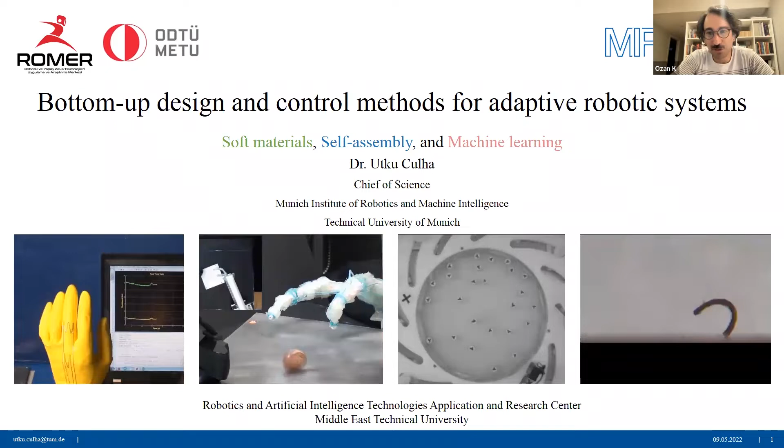Well, thank you very much. First of all, thanks very much for your kind invitation. I have been around a little bit, but half of my life and my heart is still at Ankara, Bilkent and ODTÜ, so I always feel at home when I make connections with my friends, my fellows, my PIs in Turkey. So I feel home. Thanks very much for inviting me home again.

Today, I tried to bring together some of the stuff I've been working on over the years, like Ozan briefly described, and I would like to talk about these, and maybe we go into a little bit of detail why I'm doing this as well. Ozan already talked about this, but yeah, my home is Ankara, so I left in 2012, and since then I've been wandering around like a true Turkish nomad here and there.

For the last 5 years, I'm in Germany, and after visiting these places in Central Europe and Northern Europe, I've been working as a chief of science for the last year at the Technical University of Munich. I'm the scientific manager of the Munich Institute of Robotics and Machine Intelligence. I believe it has a lot of fundamental connections with ROMER, and that's why, if you like, we can also discuss in detail what could be the synergies, the things that we could do together, which I would be very interested in, to be honest. So I feel connected to ROMER's vision and ideas, and I can totally see the hurdles and the vision there as well.

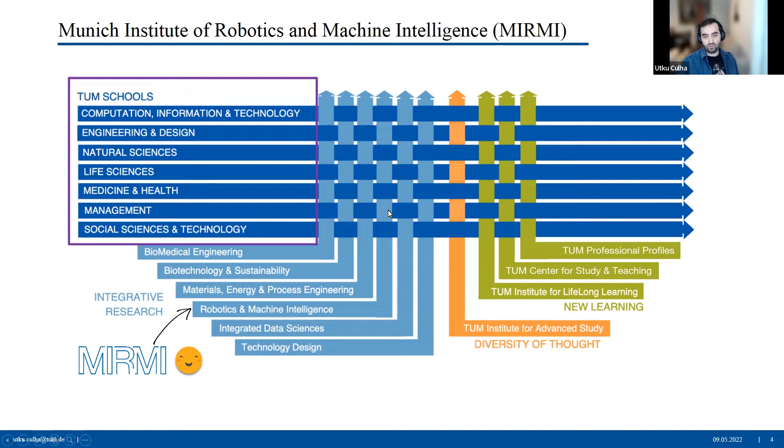What we do, as the name suggests, is a combination of, what's happening here? I hope I didn't crash anything. So it's a combination of basically four areas of robotics and machine intelligence. We are doing research on robotics, perception, AI, and machine intelligence. It's quite important, we keep saying it: we are not really doing data science. We are doing all types of machine learning applied on physical systems. We have another completely different institute that does data science, deep learning, neural networks. We are interested in things applicable on robotic hardware, not computational hardware.

So we have around 62 professors, each with their own chairs, and they bring together their expertise and vision, and we apply this vision in 4 main categories. These are our innovation sectors. One of them is environment, another is health, one is work, and the last one is mobility. Those are the innovation sectors where we put together all of our expertise and make connections with society and industry.

We have our board of directors, and we also have a scientific advisory board. We also have the industrial advisory board, which is quite a unique opportunity because we are able to sit together with C-level people of some of the top industries in Germany and in the world.

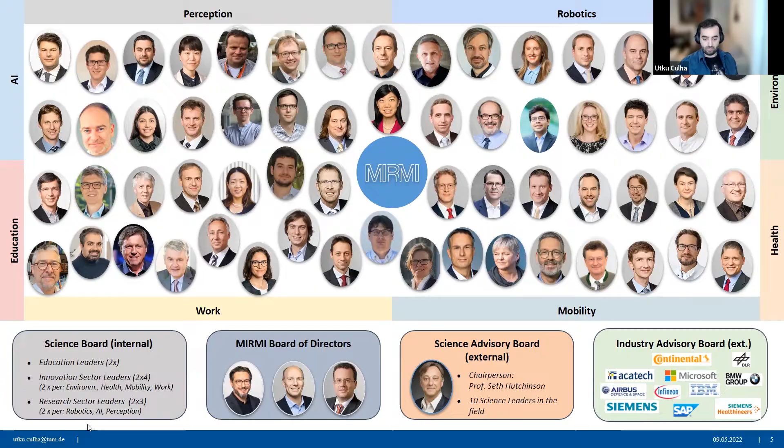Okay, so one of the things that we do here that is quite the driving mechanism behind all of the research is the Lighthouse Initiative research stories, research projects. So these are the ones that actually bring together multiple PIs from different departments. And those are the ones that we get a lot of funding from the ministries. We get funding from the German research foundations and the industrial partners. And those are the ones that have really big visions. Some of them you see on the screen now.

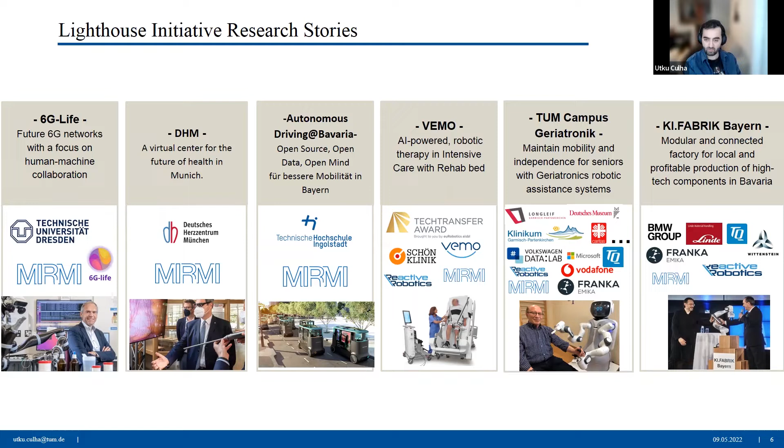We're having collaborations with different universities and different industrial partners in different parts of the innovation sectors, from communication, health, work, and mobility. So these are the ones that really make our institute a little bit more on the edge, because we are doing real world applications with real world science. So there's actually little space for futuristic, maybe exciting stuff on paper, but not really applicable in the real world. We are trying to really minimize that type of research in our institute.

I am a part of the senior management here, as I'm leading all the research activities, meaning on paper, I am doing all the research coordination between these 60 professors, but thankfully not all of them are active. So it's actually a good thing at the moment they're not all active, but I am working with all of the professors. I'm responsible for writing big proposals. I'm also a PI. I have my own research team. I work closely with the students and postdocs.

For the moment, I'm also leading a team of approximately 80 people. I think 50 of them are PhD students, 12 of them are postdocs, and there's also an engineering team. And the people you see here are also the ones that are managing the whole institute. So we have the board of directors, those are the PIs coming from different chairs, and we have officers and assistants. So I believe that's also quite a synergistic connection with ROMER as well.

So as I said, we have connections with the industry. Those are the C-level, basically CEO or CTO level people from the well-known industries. I find it to be quite unique and actually advanced that we get to sit together in the same room with these guys. They're really sparing their time for us, and they can really tell us what's missing in the industry. They really drive us, and they really drive the research accordingly, so that we know what is basically needed in the industry, so we can come together, sit together, and drive research and industrial projects together.

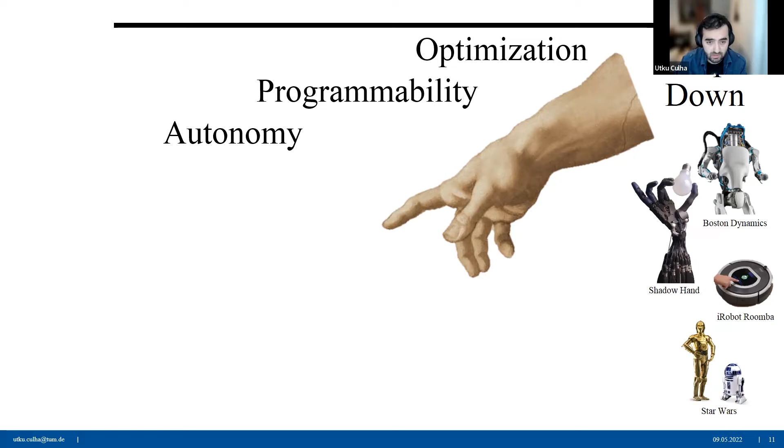What I have eventually carved out of all the research that I've been doing was bringing these two design methods together. On one hand, we have the typical top-down method that we have been applying as humankind for hundreds of thousands of years. Basically, we start with an idea of a final image of what we would like to build. It could be a robot, it could be a cake, it could be a space station. But we always start with that big idea, and then we build things with that top-down design. And of course, it has given us all degrees of freedom in terms of autonomy, programmability, and optimization. But the more I started working with soft elements and small-scale systems, I realized that the way things are built in nature really follows a different agenda.

The things actually come from the bottom up. They're little things, they're really dumb and passive. They don't have any idea about the world or have any idea about anything, basically. But through local interactions, through some external stimuli, maybe, and given millions of years of freedom, they come together in meaningful and maybe just basically operational systems.

And as compared to the other top-down methods, we see that things that are built by bottom-up methods have quite a high adaptivity capacity, they have degrees of freedom, they have modularity, and more and more we see these methods applied in robotics as well. For example,

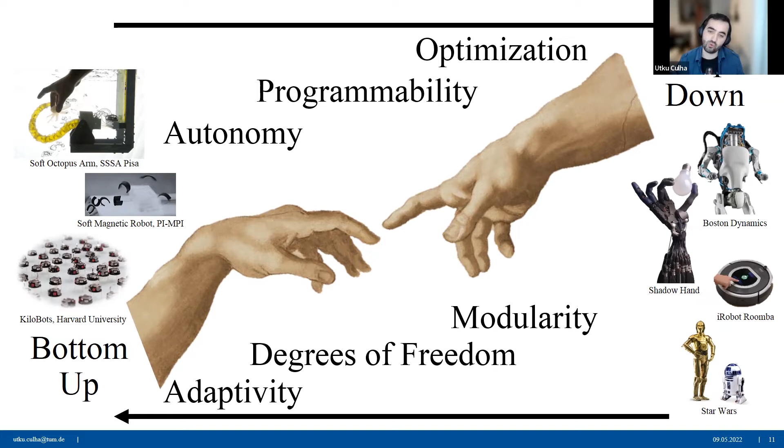Professor Şahin is one of the pioneers in swarm systems. I'm pretty sure that he has been applying these methods in control and planning and the flock management of the swarm systems. But more and more with the smaller scale systems being introduced in robotics with functional materials, we see that they are also being applied in soft robotics. And this is the connection to what I have been doing for the last 7 years.

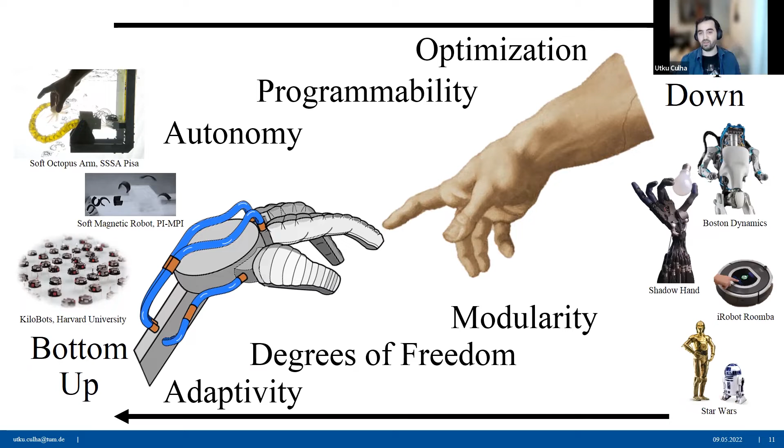So my goal is to really find a middle ground in between and hopefully get a happy marriage between these two systems. So I am coming from a robotics background, and I still have some type of OCD about introducing some type of control and planning into these naturally chaotic systems that are being built bottom up. So this is my main motivation. I'm trying to take the systems that we know in conventional robotics and apply them to the bottom-up systems in the self-assembling and soft robotic world.

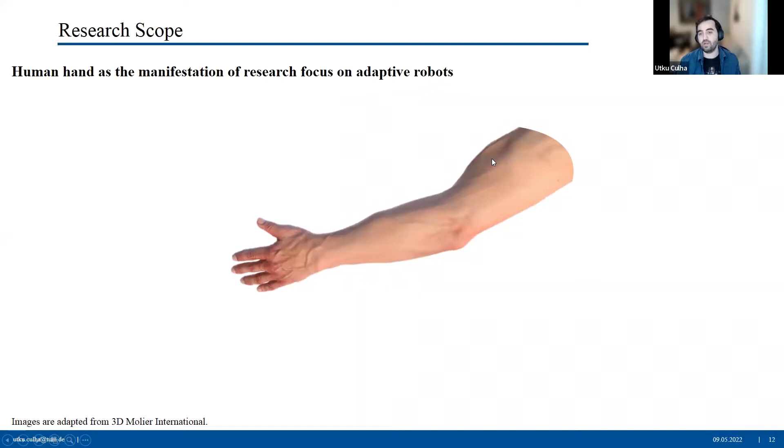Actually, I have chosen the human hand as a perfect manifestation of all the research topics that I have been working on. One of them is the hybrid systems that combine soft and rigid elements together. The other one is the self-assembling bottom-up systems that are being built by using small systems. They come together, they're modular, and they bring together something more than the combination of the systems.

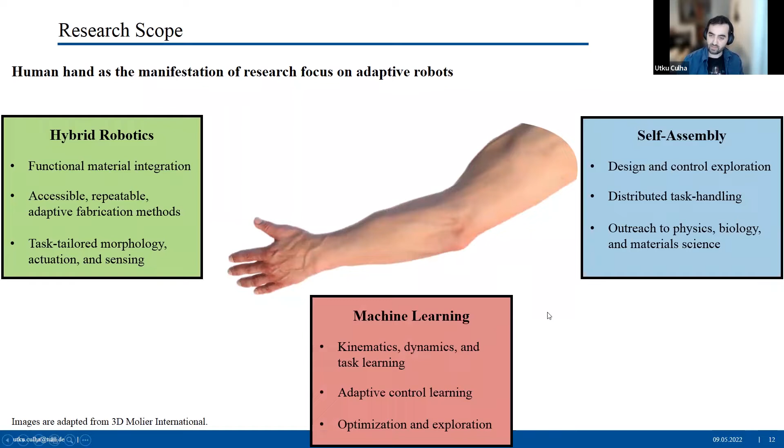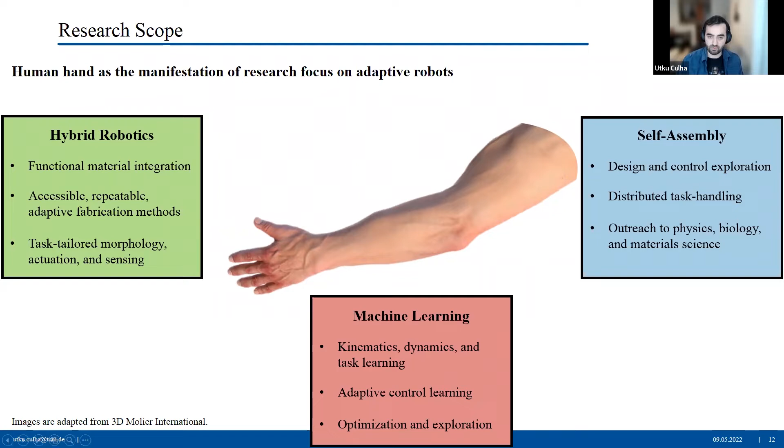And the last one is basically lifelong or machine learning that will tell us what has been missing in the whole function and morphology and the control, basically investigating the things that are not obviously clear or apparent at the beginning, but then help us to explore what's behind what we see in the robotic systems.

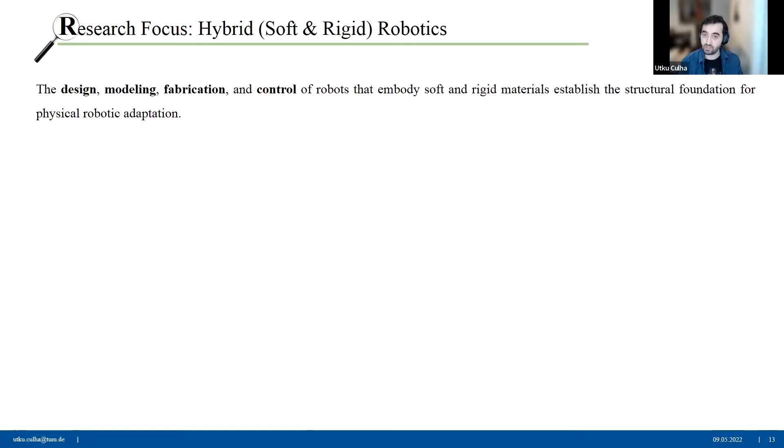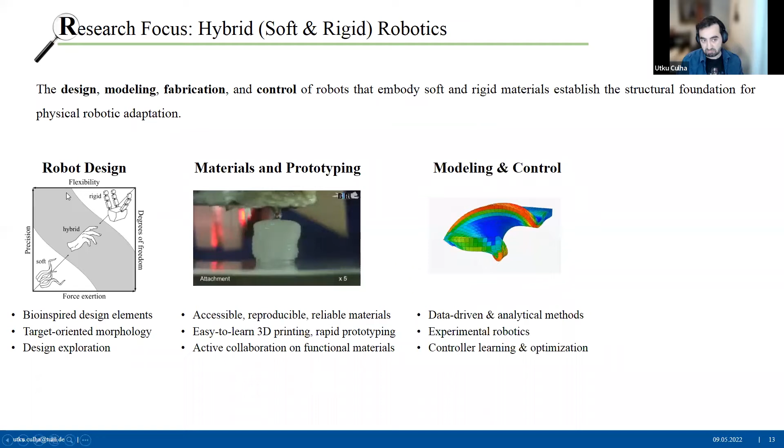So one of my research focuses is hybrid robotics. I call them hybrid because of the combination of soft and rigid materials together. And I have been working on the design, modeling, fabrication and control of these robots that are made of these soft and hard systems together. And these are basically the pillars of the robotic systems.

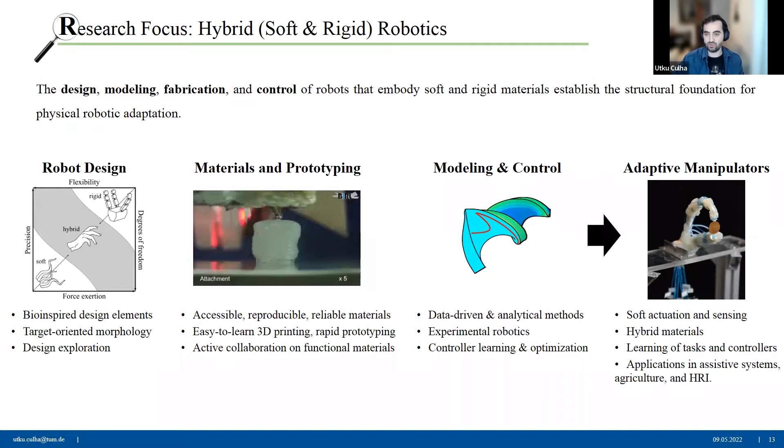You have the design, you have the materials, then the prototyping methods, you have the modeling and control, and eventually I managed to bring all of them together into adaptive manipulators. That's basically the story of where it starts, from the design to prototyping to modeling and control and eventually building adaptive manipulators.

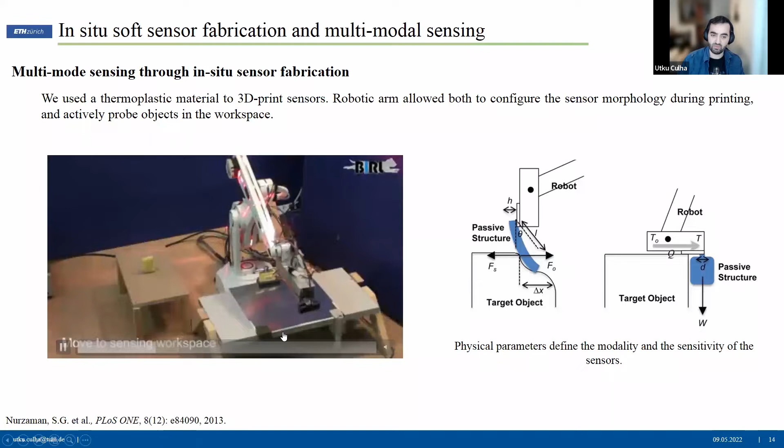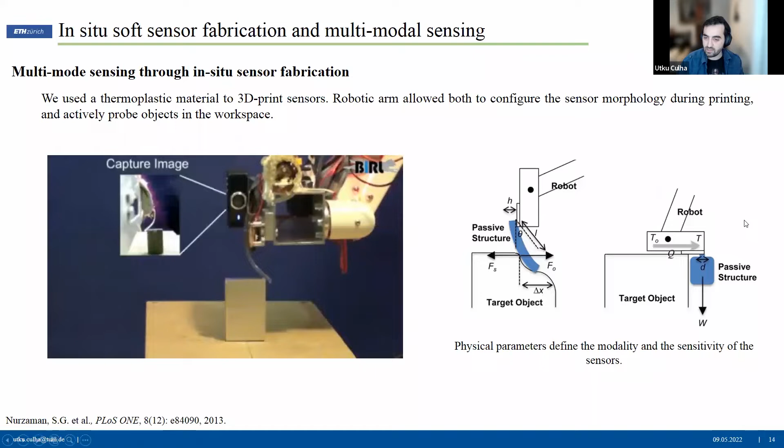But what we have attached to the end effector is a hot glue extruder. Basically, it's the ones that you use to glue things together. And it's basically a 3D printer, but it 3D prints hot glue. So we have basically modeled the adhesive and extruding properties of this hot glue, and then we turn that into a very primitive sensing system such that the robot, for example, I'll stop it here on the video, prints this

stick, a long stick. We know the modeling of the stick, we know the bending models and everything, and then the robot basically prints that, attaches it onto itself by the adhesion properties, and then goes ahead and explores some objects in the environment.

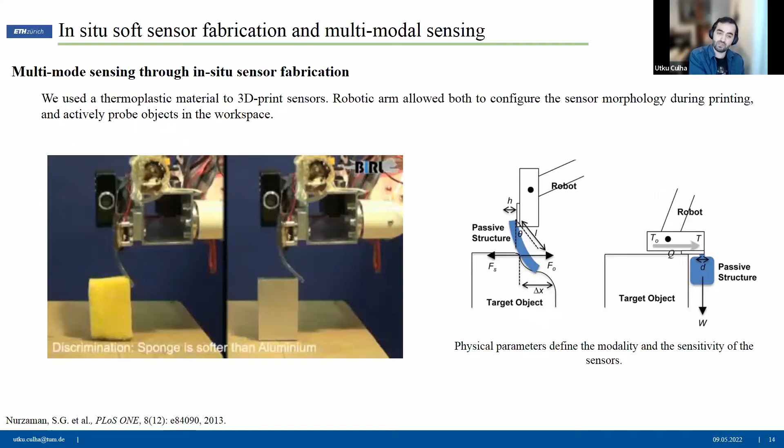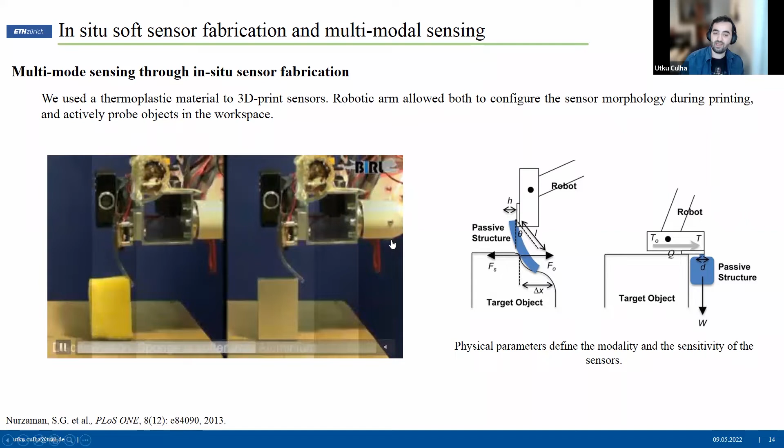Very primitive. And through the modeling of the bending beam, we know exactly how much force would be necessary to bend this specific beam. And through that, the robot has an idea about how soft or how rigid the object is. Using exactly the same system, exactly the same material, but just changing the morphology, we are able to now sense temperature.

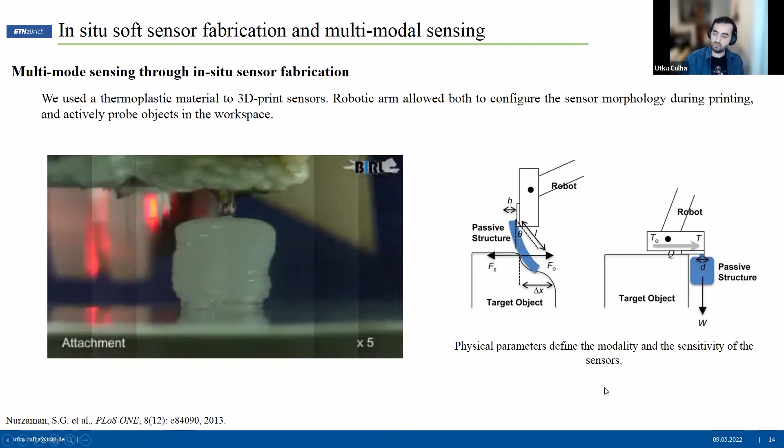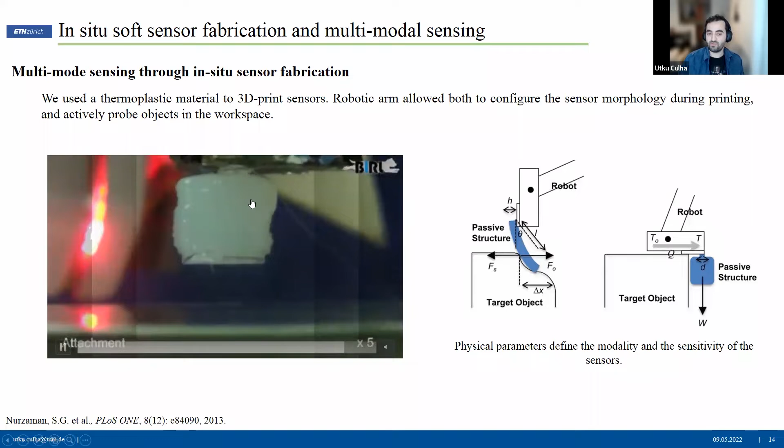But please keep this in mind, it's a very primitive sensing technology, such that this piece, this volume that we print, we know the weight of it, and we know exactly how much heat needs to be transferred such that when it touches a hot object through the heat transfer, we know the adhesive properties, we know at certain temperature, this is going to melt down and drop. So in a way, it's a very simple binary sensing system. It's like, it's hotter than this temperature or colder than this temperature.

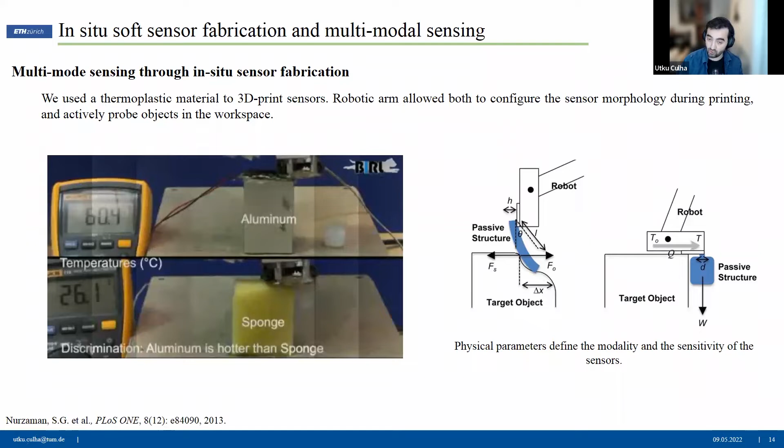In a sense, that was one of the earliest methods of exploring adaptive systems. Again, by introducing the control and methods of modeling and simulation to a continuum world of soft material in terms of extrusion and adhesion. This was the second thing that I have done, basically following the same idea. But here we are now talking about something a little bit more advanced in terms of sensing capabilities.

This was the time when I was in ETH. We worked together with the materials department called EMPA. They're basically an amazing institute. They invent tons of different materials, but sometimes they don't know what to do with them. So this was a perfect collaboration. They had this material called the conductive thermoplastic elastomer. It's again a thermoplastic extruding system, and this time you have conductive carbon filler in it.

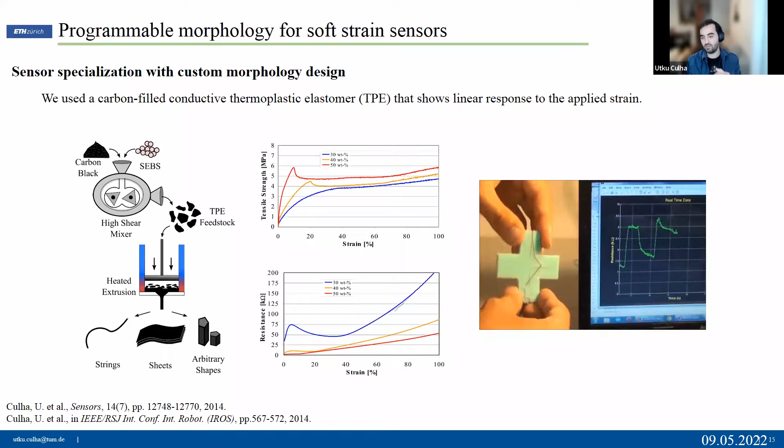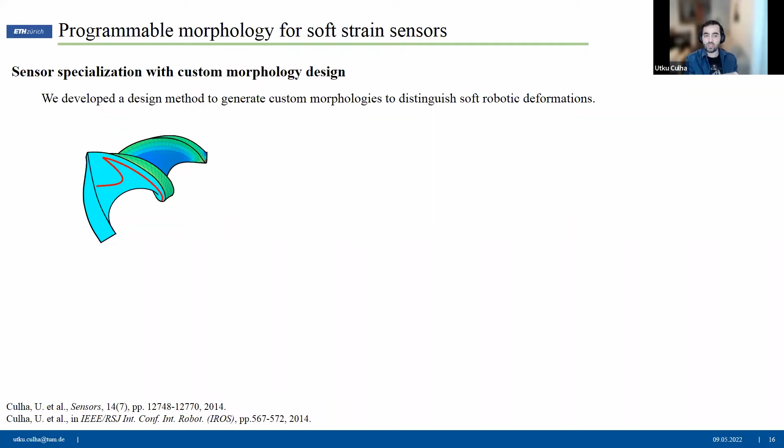So what you do here, you basically generate a voltage divider circuit, as I say. You put this material on top of your soft elements, and then you can see, as in the video, you can generate a strain response from the system. And then the way I worked on this was basically modeling the deformation of the system. It was on the surface. From the surface, we were extracting the strain information and just basically connecting the dots like in these old puzzle magazines. You were able to generate a custom morphology that is unique to detect the certain strain information that exists on the surface of the soft material.

And we were using this to define our custom morphology. Because this was a linear combination of certain strain regions, we were able to optimize the signal to noise ratio, and then we were able to get unique information.

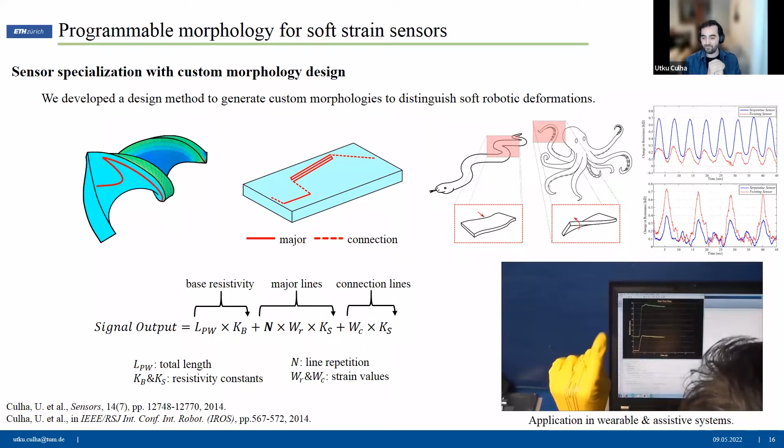So excuse me about the hand gesture here. I didn't know. We were trying to show the letters of our institute, ETH. This is American sign language. So what you're seeing here on my glove, that's me. You can see that on the middle finger, you see these two sensors. Those black things are the sensors. And from two different joints, we were able to get unique information.

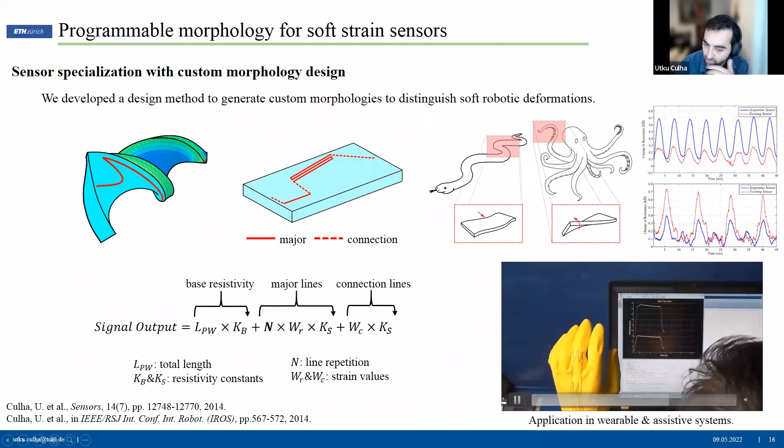And with these two pieces of information, we were able to basically understand the type of deformation and then convert that into sign language. Quite primitive, but still the idea behind this one is applying methods of modeling and control so that we were able to generate sensing for soft robotics. That's the main idea. And we went on and we applied this to very common deformation types in the soft robotics world, which is basically bending and twisting. And we were able to generate sensing information for soft robots.

So this was sensing. That was one part of what I have done. And this was basically, what do you call this, like a side project. We wanted to see if we could really make use of the same model that we have developed for the extrusion of that hot glue material. By the way, it's just the Pattex hot glue. You can just buy it from every convenience store. This was basically the first half of my PhD. I burned myself quite a lot, but I learned a lot about this glue. It's quite an interesting and educational tool, by the way.

It really allows students to build prototypes very quickly so that they can really build things with their hands and see how they move. And then we really made use of that in the education part as well. We made a lot of workshops. We gave this to students, and then they built these robots. We gave them actuators, self-propelled systems, and then we asked them to put these together so that they build crawling robots. And that was actually quite interesting.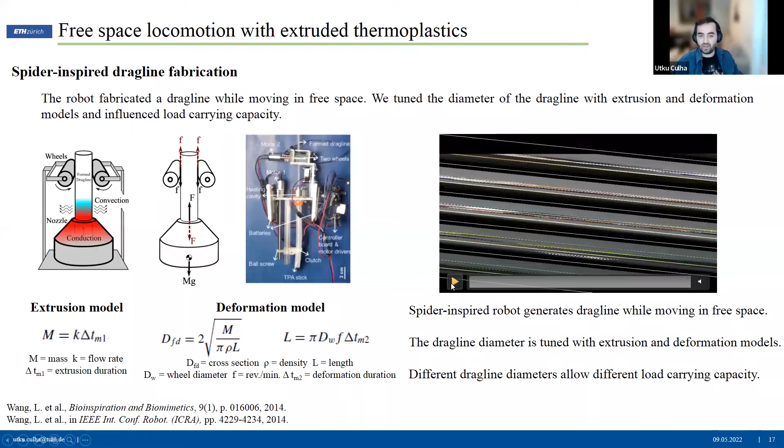down by gravity. So we could model all the extrusion parameters so that we can change the diameter of the dragline, we can change the speed of the robot. And the idea is that we were able to basically show that once we applied this modeling and control, we were able to generate a different type of locomotion in free space.

So this was basically the first half of my PhD, where I worked a lot with the soft material, the hot glue. And then I went more towards the field of combining these systems together. This is how I am coming to the human hand as the perfect manifestation. So one idea we had was to introduce softness into robotic manipulators, such that we introduce adaptivity, but at the same time, we still wanted to remain in the robotics world. So we didn't want to go full soft, where we don't have any idea about what's happening.

So this was our initial attempt of building an anthropomorphic robotic finger, such that we have rigid elements like the human bones, but unlike the typical hinge joints that robots have, we have these soft joints. Basically, it's wrapped around by tendon-like systems. We have shells that are basically covering the joints. So with the joint geometry, which guides the motion, and with the shell that is covering the whole joint, we're able to generate a freedom space that is beyond the joint motion.

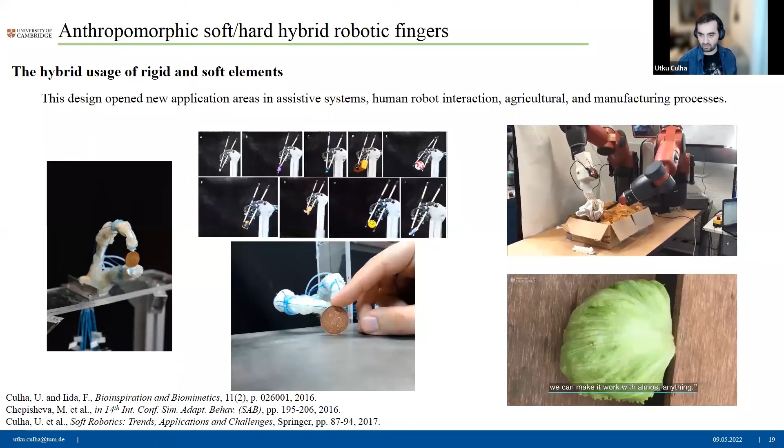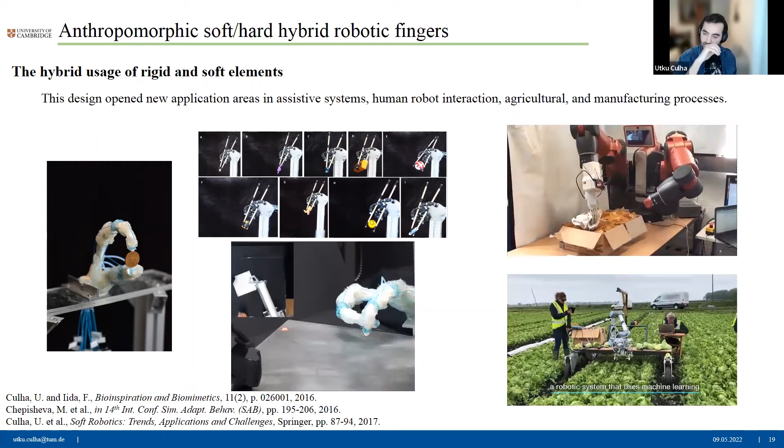Sainsbury, that's basically the equivalent of Migros in Turkey, but they produce their own produce. They were interested in applying these fingers, robotic hands, in collecting lettuce, which is quite a tough robotic challenge because the lettuce is quite soft and you want to pick it up without exploding it. So it was a good application field that shows how we can use soft and rigid systems together.

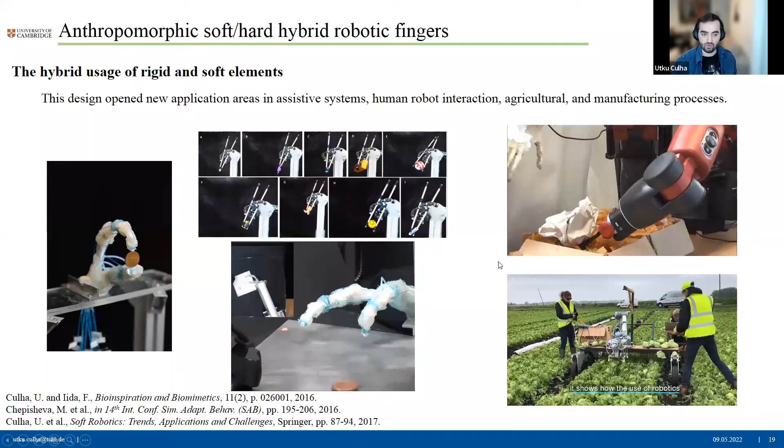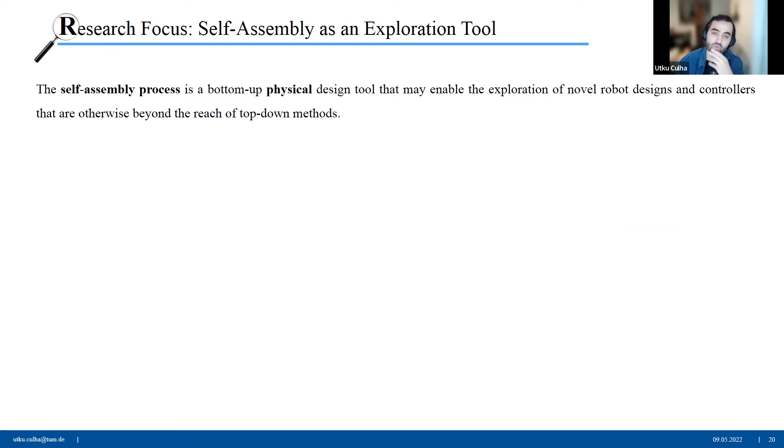And eventually it turned into a startup company. I guess they're now applying that onto the fields. So that was basically my PhD. Then I started working on self-assembly processes because I wanted to take this research towards self-healing or self-adapting systems that are more like cellular systems. And that is why I moved to Max Planck Institute to work a little bit more on the self-assembling systems, because they were experts in small scale soft robots, small scale magnetic systems.

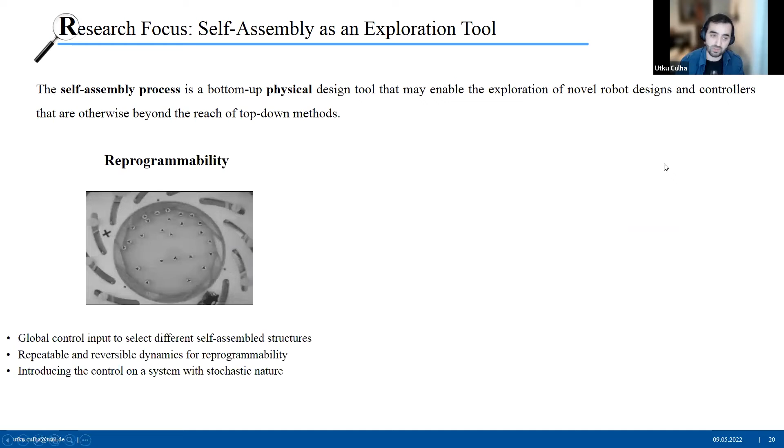And my idea there was to investigate this dynamic world of self-assembling, self-organizing systems, which is beyond my capacity. I can easily acknowledge that this is too much to handle, all these Brownians and all these dynamic systems. But I still managed to scratch the surface a little bit so that I understood a little bit of these self-assembling, self-organizing systems.

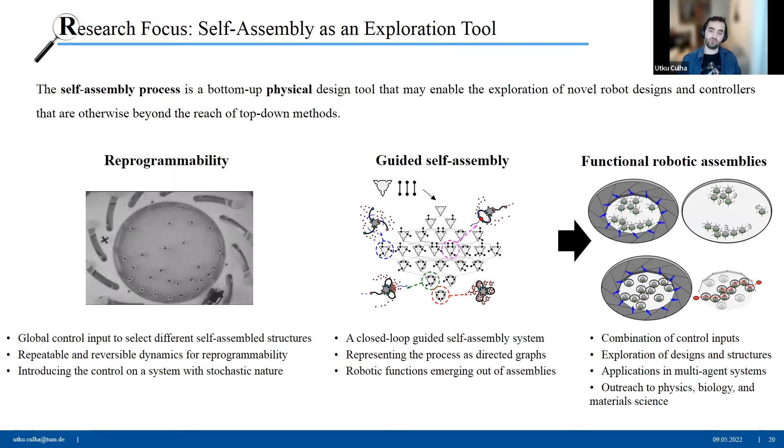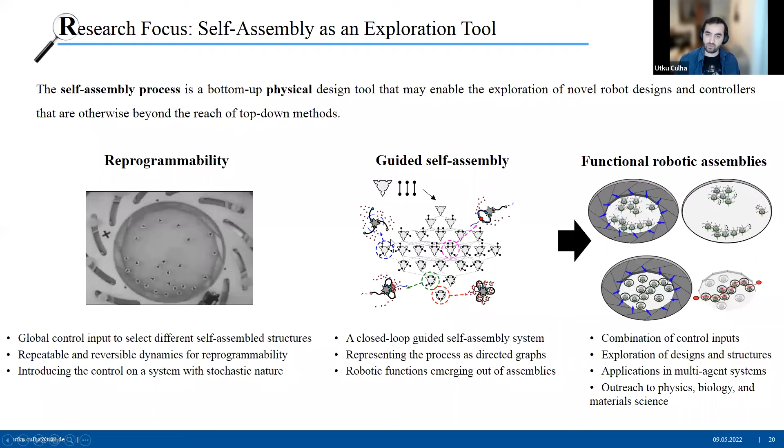What's the balance of how much you can introduce control and how much you can introduce modeling to a basically naturally chaotic system, such that it still explores a lot beyond the human control, beyond the human foresight, but still you're able to operate these systems and they do the things that you want them to do in human lifetime. So my idea was to basically look at reprogrammability, guided self-assembly, and then taking these things into functional robotic assemblies.

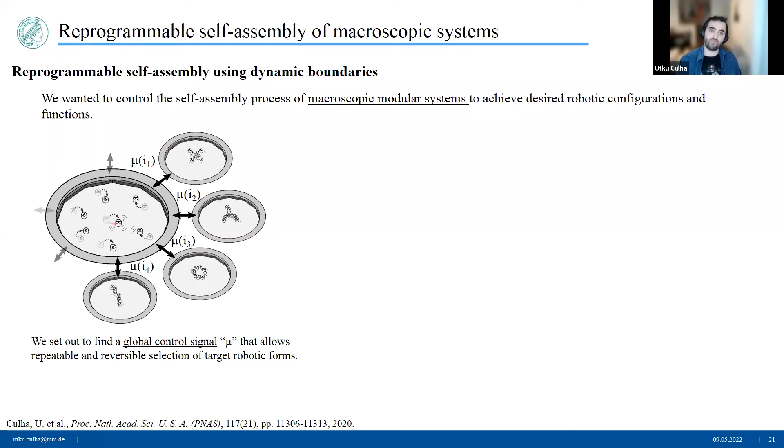I had the chance of getting a Humboldt scholarship there, which gave me the freedom to not worry about publications for 2 years. So I was able to really go into understanding the self-assembly world. And what I wanted to do there was really, again, scratch the surface a little bit so that we could use macroscopic systems and apply self-assembly, self-organization plus control, to investigate how these robots can come together. I'm pretty sure this resonates a lot with Professor Shine's great work in terms of swarm systems. But I try to do these things with much, much simpler and much dumber particles.

What you see here is basically 3D printed particles. These were, I think, 5 millimeter in diameter, and they had a magnet inside them. All of them had a permanent magnet. What I did was I placed all of these things on a system like this. What you see here is an exploded view of the system. It's an external control method that basically changes the free space of these particles. And each of these particles, as I said, they have a permanent magnet and they're all in the same orientation.

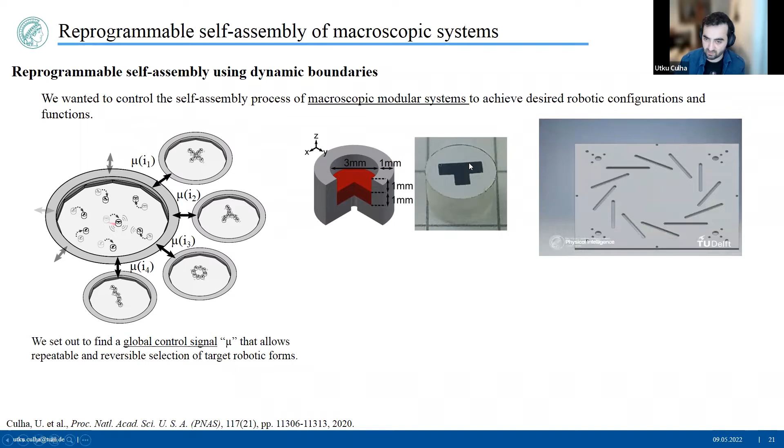So if you squeeze them in a 2D world, they're repelling, right? Once you squeeze them all together, they're going to repel one another. And then in order to apply the same type of Brownian systems, I needed some sort of a self-propelling mechanism for these particles. What we did was to put all of this system on an orbital shaker that generates the kinetic energy to these particles. So you can imagine that these particles, with the given space, they all move around, they shake.

And then what we wanted to do was to see if this control method, which is basically squeezing them, it has a lot of connections to material science, by the way. But we were extremely careful in not making one-to-one analogies because we got rejected multiple times. So that's the curse of working in a multidisciplinary world. You have to be really respectful and careful in what you're saying. You have to say this is a Brownian-like motion, this is an annealing-like work, because you're trying to do the same things in the macroscopic world, which doesn't apply. But you got the idea.

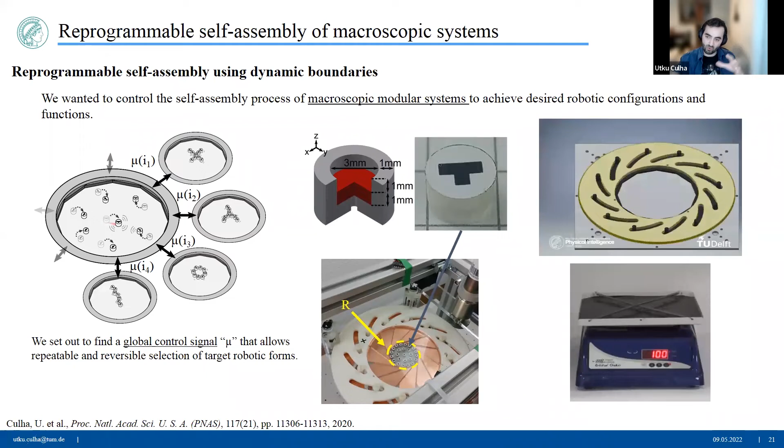We wanted to find the interplay between this free motion and the external control, such that the question was if we can really change the speed of the annealing, the speed of the compression, to see if these particles will end up in the formations that we want. Because what you're seeing here is just one example. The more you squeeze, because the particles are repulsive, they all try to repel each other, even though the whole system is shaking like crazy, you are basically trapping them in a magnetic potential lock, because they can't move anywhere.

There's this balance between the magnetic force and the mechanical force, so they can't move. And they basically freeze in time and space in different configurations like this. And we wanted to investigate what's the connection between that control method, which is basically the speed of compression, and the final patterns that we get. And what we are defining as pattern here is very simple.

We had these 25 particles here, and eventually they all freeze up in these different circular formations. And we wanted to see if there's a statistical connection between that and our control method. I hope that you see that this is really trying to introduce some sort of a control method to a very statistical system. And we managed to extract some statistical information out of it.

I'm going to give one example. I think that's the simplest or the easiest one to understand, and it has a lot of connections with material science as well. The slowest compression speed, the slowest annealing, basically, or the more time you give for these particles to find their best location, we ended up with a pattern that has the lowest magnetic energy. And the way we describe magnetic energy is basically the potential that is calculated in between each of these particles.

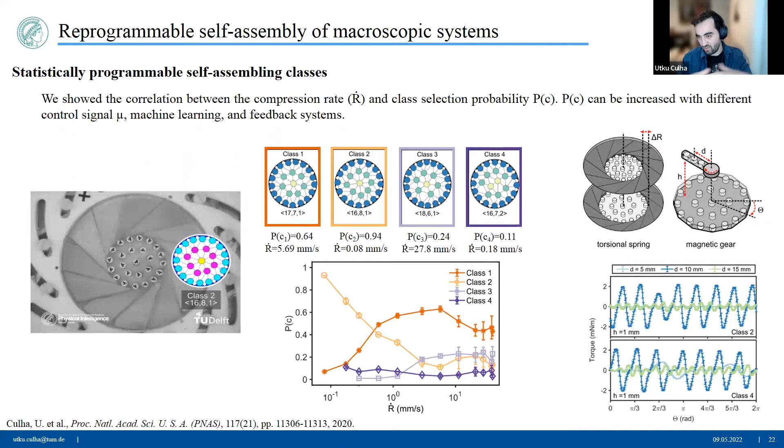And there was maybe a little bit too much forcing here, but there was some sort of application that we thought of, because these are magnetic systems. You can imagine that that's a variable stiffness mechanism. So there's a torsional spring, because depending on where the particles end up, they generate a force on the leaves here. So you can imagine that could be a continuous variable stiffness mechanism. Also, because there's a magnetic field on top of the system, you can imagine there's a magnetic gear whose property you can change by changing this method.

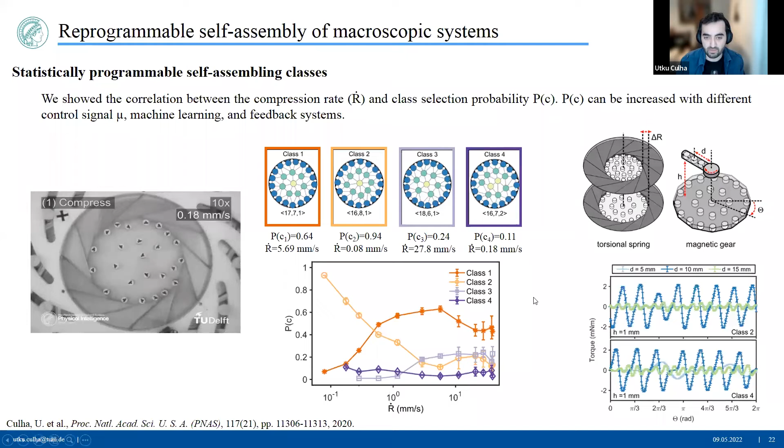So that work actually took two years to really go into detail, and then I explain what's the control method, what's the model, how you can explain these things. And then after 2 years, we were able to apply the same approach to a little bit more fun, more robotic application. Here, what you see is a family tree. It's basically a connected graph. What you're seeing here are 4 different pieces.

The cheese-looking thing in the middle, triangular, is the hub. It has magnets on it. And all these little 2-dot arms are basically magnetic arms. They are connected to one another with a soft system, and they also have magnets in them. But unlike the previous one, we have an attractive interaction between these arms and the hub. So arms repel each other, but arms attract to the hub.

So the idea is, given these 4 particles, how can we introduce some sort of an external control method while these are freely rotating around, such that all of these particles end up the way we want them? And if you force enough, you can imagine that each of these structures can represent some sort of a robotic system. For example, if you have all three arms attached to the central hub, we call that a mother bird. So all arms are connected.

And we wanted to see if we can start from a completely disassembled system, introduce the control, and really use graph theory to guide the whole assembly towards the target assembly, in this case the mother bird. So the previous one was kind of an open loop system. We just applied the same external control method, which was the speed of the compression, and finally took the final image. So that was, in a sense, a much looser feedback system.

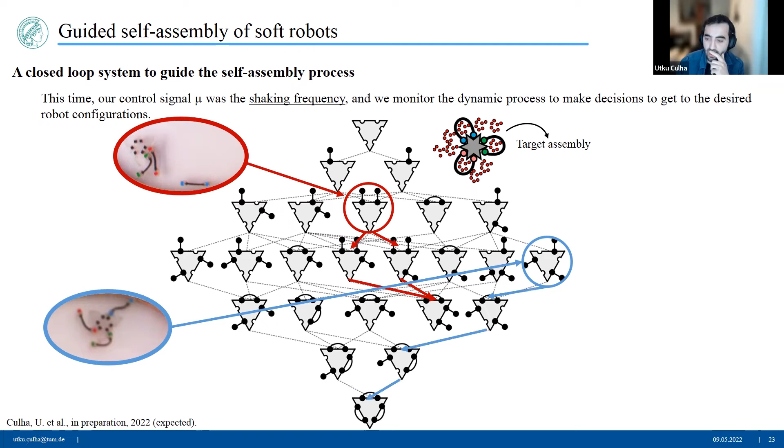And this means, for example, the two arms are attached too close to one another. It means we can't really go ahead by applying the same approach. This means we have to change the frequency so that the system is disassembled and then they can be assembled again. But for example, for a different snapshot, let's have a look at this one. So the arms are actually attached like this. So we can apply a certain frequency of orbital shaking so that it follows this graph here and eventually it reaches the target assembly.

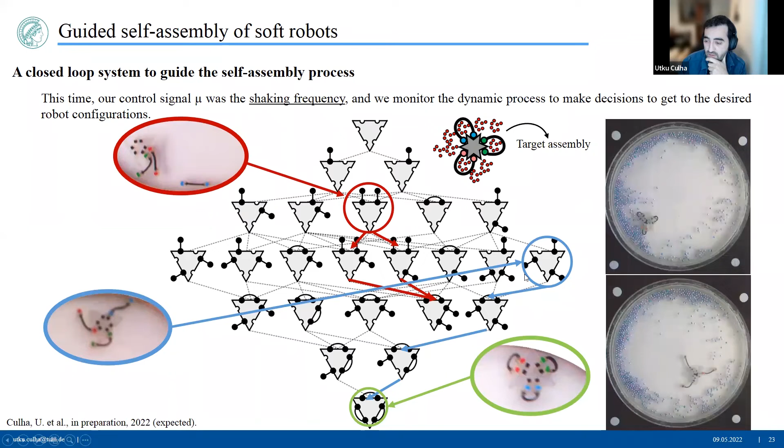So what we can do when they're all assembled, based on how they assemble, as I said, you can attach some sort of robotic function to each of these. So the top one, because these are also magnetic, you can also apply a magnetic actuation to move them around. You can just generate this propeller motion and so on and so forth. So that was the self-assembling world. As I said, that was quite a big quest in terms of scratching the surface and understanding the self-organization and applying some sort of control methods to see if we can really guide these systems into what we want.

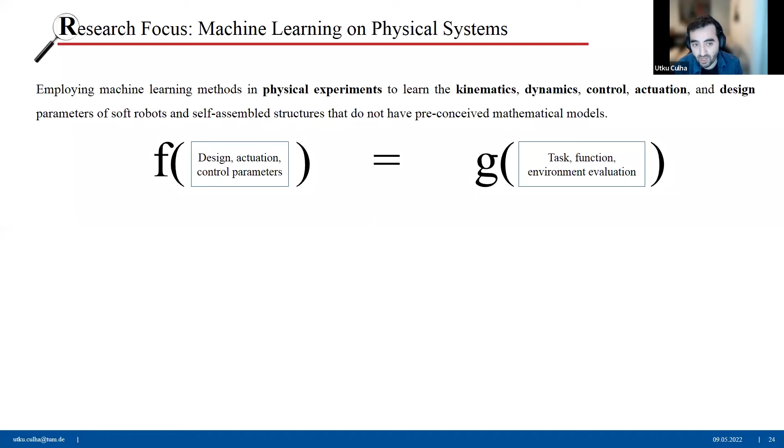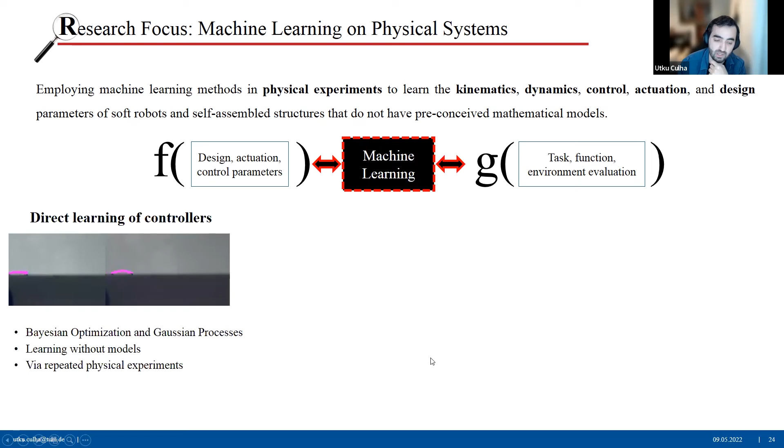What we have done later on was to apply machine learning methods into soft systems and self-assembling systems, which are basically lacking the connection between the input and output functions. So in general, you can say that they are lacking the Jacobian a lot because of the way they're built, because they're very statistical. And this is the point where we started applying machine learning on these methods. And this was my last years in Max Planck Institute in Germany. And here we started to investigate if machine learning could extract the controller parameters for small-scale soft robotic systems.

And the idea was to have these soft continuum and externally actuated magnetic robots, which had really not so clear control parameters. And we wanted to really go into the detail of finding the optimized control parameters for these systems. And the next steps would have been extracting the dynamics and kinematics of the systems, and then basically lay out the unknowns of the soft robotic world in the small scale.

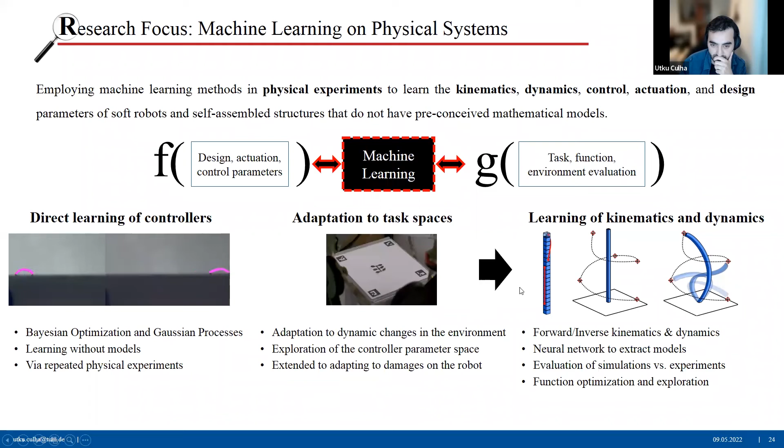This was a work that I had the chance, I think I have seen his name, he was in the audience, Sinan Özgün Demir. I had the chance to work with him in Max Planck Institute. He was the one who really took the whole system from the bottom and then really brought it into a very adaptive and trustable system.

So what we did was we took one of the flagships of our institute in terms of publication, we took a system like this. I'll stop the video here. If I'm not wrong, this was a 3 millimeter long cast robot, which had magnetic particles in it. The way you do it is you basically mix these particles together in an elastomer compound. And then once you apply a very strong magnetic field, while the robot is in a certain position, the magnetic orientation of the particles is basically fixed.

And once you reapply a magnetic field that is actually weaker than the original one, you can generate a magnetic torque around it. So the particles basically try to align themselves with that magnetic field, and then they generate this torque on the robot. And that's basically the premise of the whole magnetic actuation in magnetoelastomers. So this was one of the flagships of the institute. They have generated this crazy little robot by applying different magnetic directions and frequencies. You can make it walk, you can make it jump, you can do a lot of things.

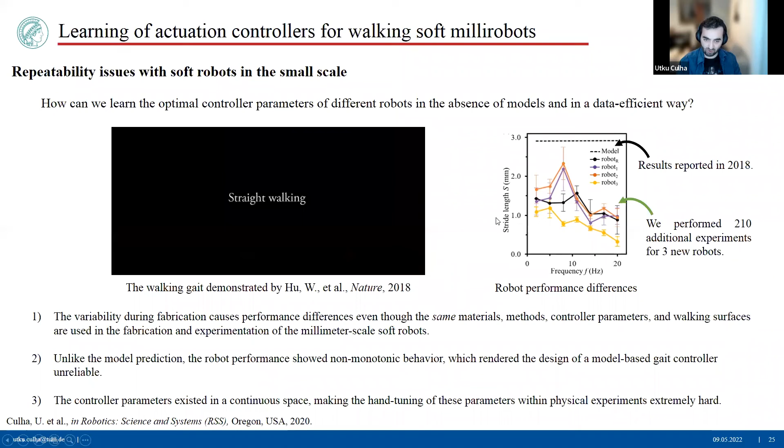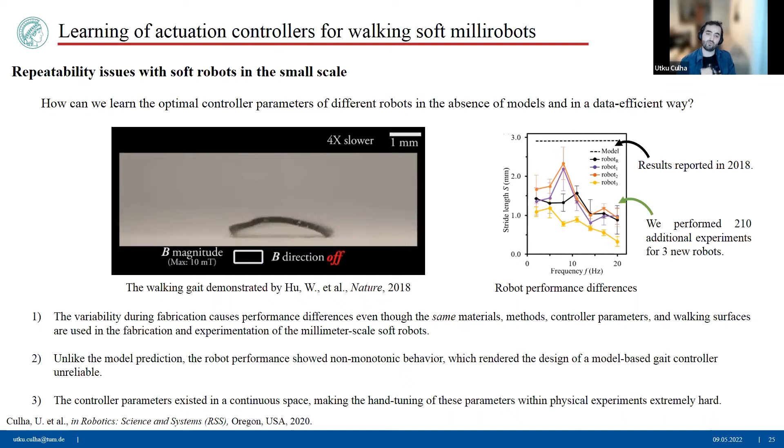But we got a bit OCD about this as roboticists. We said we wanted to really understand if you can fully control the system, if you can really make it repeatable, trustable, because the whole intention of using these systems was to put them inside a human body in medical applications. And without full control, we were not very comfortable. So what we did with Sinan, we looked into the control parameters of this, and we realized that it was not really repeatable.

So Sinan built this magnetic coil system with the camera all around, so you could apply a three-dimensional magnetic field, and you can change the frequency of it, you could change the orientation of it. Even though that's a very small system and the control parameters are quite limited, if you wanted to apply a typical explorative approach in terms of looking at all the parameters, you would have to do hundreds of thousands of experiments. But we didn't have the time or patience or the money to do any of these things.

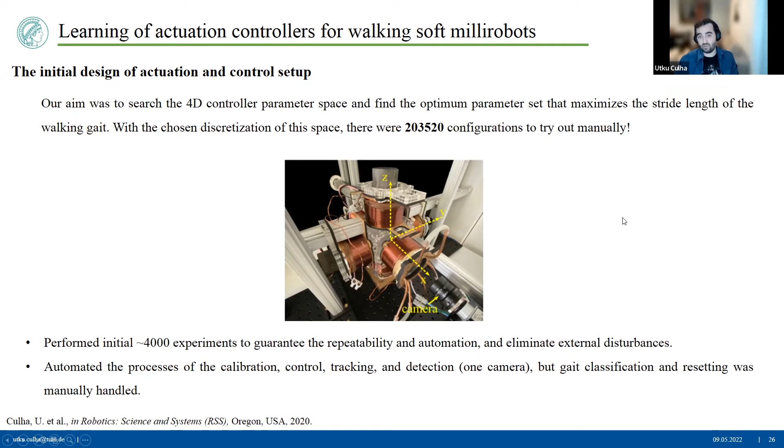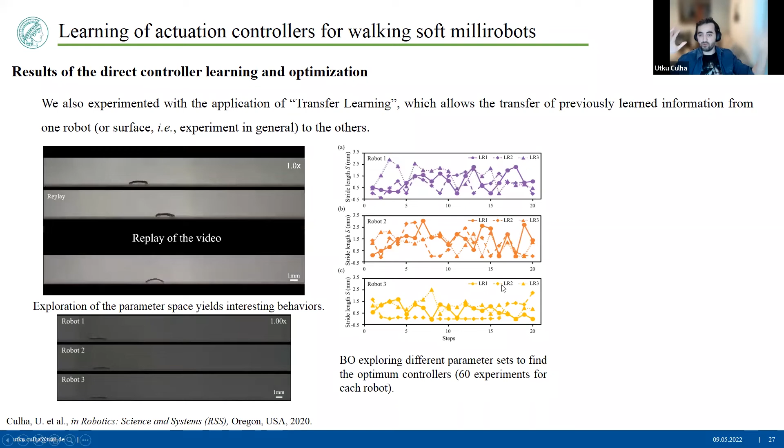We looked into a different direction. What would be the most efficient way to look into the controller parameters and find the most optimized ones and repeatable ones? So that's why we investigated Bayesian optimization. And what you see here on the top is the system basically looks at the whole parameter space, which exists on multiple dimensions, and interestingly it looks at the full space. It's a global optimization system. It represents the function that is not known, but it represents it with a Gaussian, so it really includes some unknown. It includes some redundancy. And by looking into these different parts of the whole dimension space, it finds the optimized parameters in a really short time.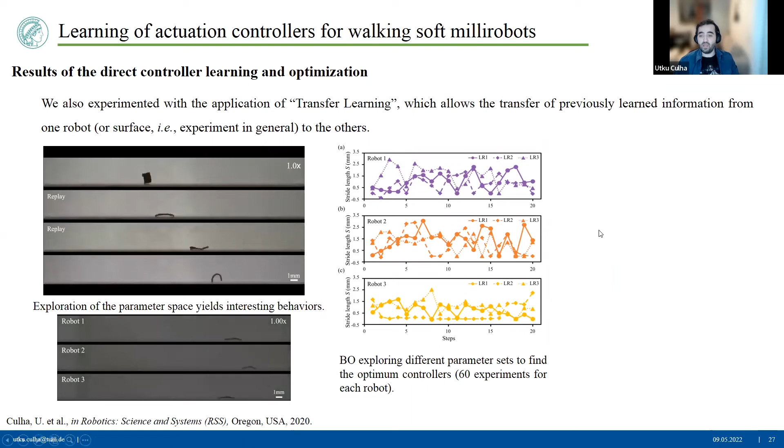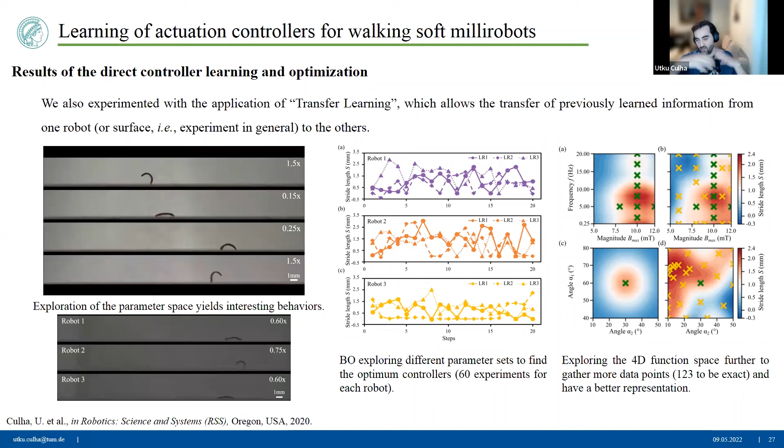So what we were able to show is, applying these Gaussian processes and Bayesian optimization with different robots that actually have different magnetic properties, even though it was claimed that they were produced the same way, we saw that at the small scale they generated different locomotion modes. We were able to find the optimal control parameters that are repeatable and trustable. And here you can see at first, this was the blunt approach of using two parameters for the controller. This was the belief that we started with, but after the optimization, we saw that actually the whole space is more complex. So it also helped us to really investigate the full parameter space.

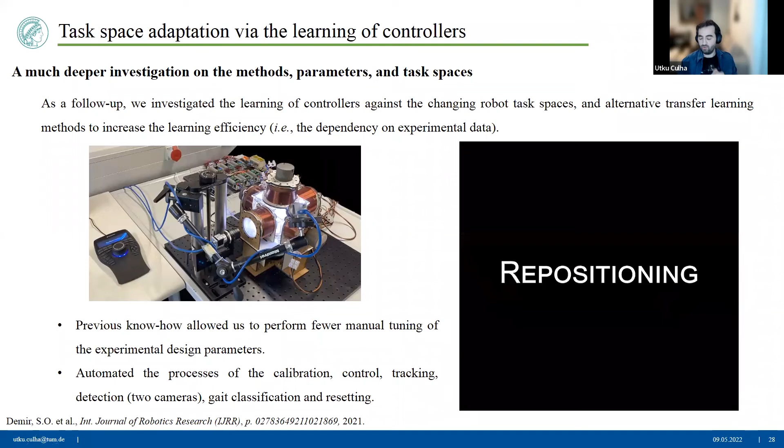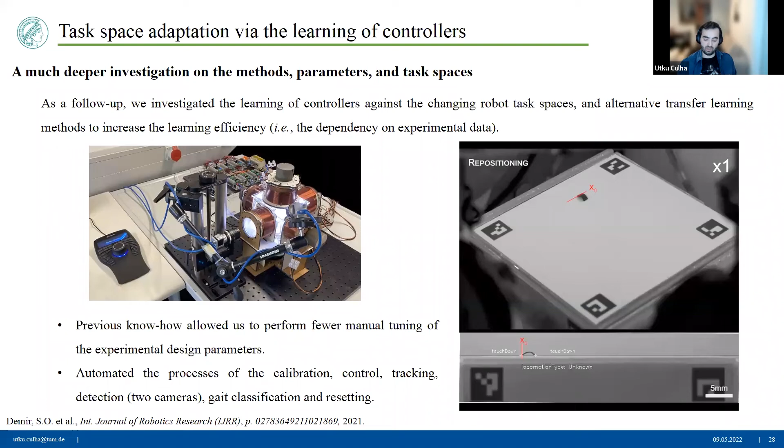So I'm going to skip some of the details here, but I hope that the premise is quite easy to understand. After a while, we wanted to upgrade our system. We put some fancy lights and a better controller, a better tracking method. And this is very similar to what I have done with the squeezing method. We wanted everything to be optimized, automated so that we can go ahead and drink our coffee. We also implemented the automatic resetting mechanism and automatic locomotion detection mechanism; basically by looking at the steps of the robot, we were able to see if it's really walking or not. That was the thing that we were trying to optimize: the stride length of this little robot. So this allowed us to really investigate more in terms of changing the parameters and investigating different environmental parameters.

For example, as I said, we were interested in putting these inside the human body, mostly in the GI tract, inside the stomach, which is a crazy environment for a soft robot like this. It is sticky, it is rough, it is viscous. And imagine that you don't have the repeatable control system, plus you're introducing this crazy world, and the robot will deteriorate because the material is going to go through some real deterioration while interacting with the environment. So what we wanted to do is not only understand the parameters, but also adapt these parameters along with the robot being deteriorated, along with the changes in the environment.

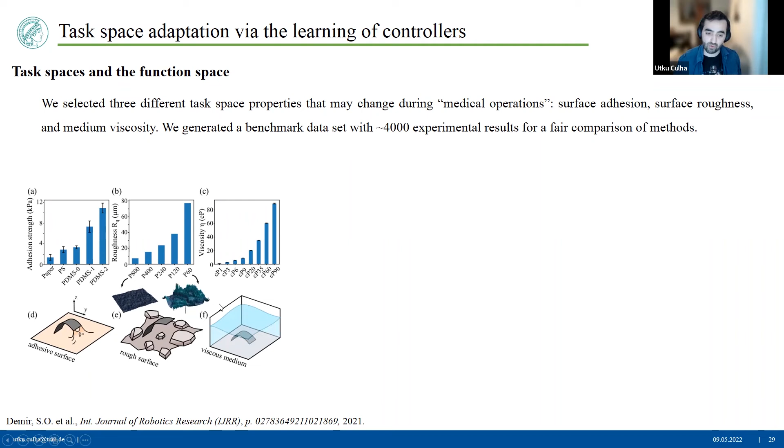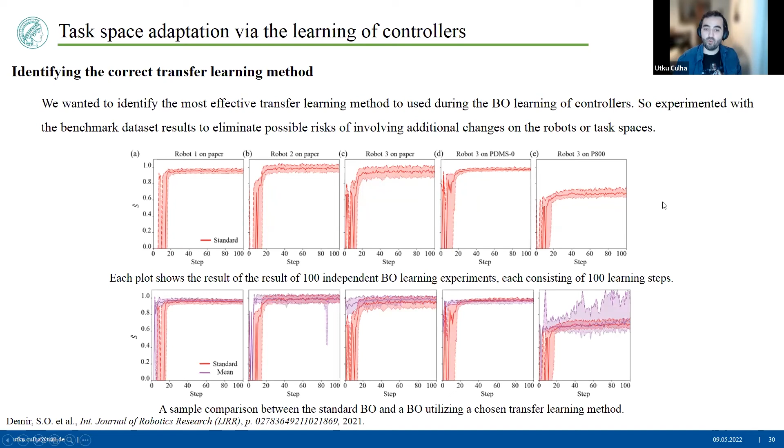So with this automation applied and with this fully reversible and repeatable system, we were able to investigate environmental parameters such as the adhesion, the roughness, and the viscosity of the whole medium. It was a big space. Of course, we used the same approach of Bayesian optimization, and we were able to go into the details. We did hundreds of experiments to see what's the limit for each of the robots, and then the Bayesian optimization was able to tell us what are the optimized regions for each of the robots and each of the environmental factors so that they can really keep on walking. For example, I will show you three videos here.

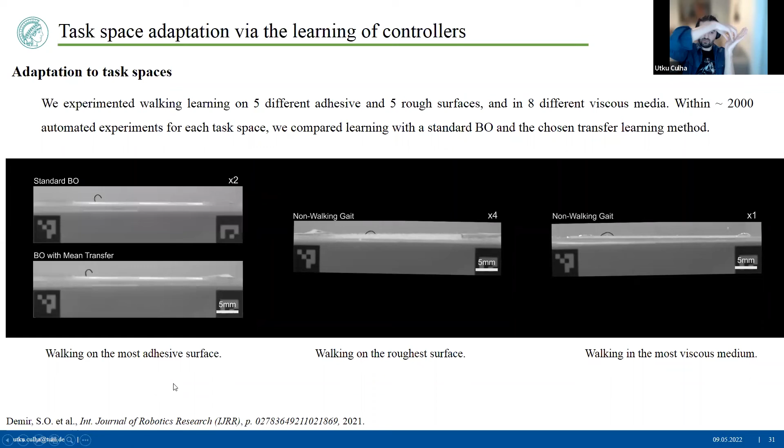You can see that you have one robot that is optimized for, for example, walking on a certain floor, but then you introduce the same robot to walk on an adhesive surface, you can see that it gets stuck, right? And we really don't want that. And the Bayesian optimization was able to really look into the different parts of the parameter space, and then it was able to find the optimal controller parameters such that the robot is now able to walk.

The same thing applied to a rough surface. It didn't really work. When I say rough, basically it has a lot of gaps in it, cracks in it, so that the robot is small enough to actually fall into those gaps. You can imagine the same thing applied, and then the robot was able to walk.

And the last thing we did was to show if it applies to walking in a very viscous fluid, because if you apply the same thing, you can see that the robot starts to basically swim. And the same optimization method was able to find the optimized method such that the robot doesn't really leave the surface, but is still able to implement the walking.

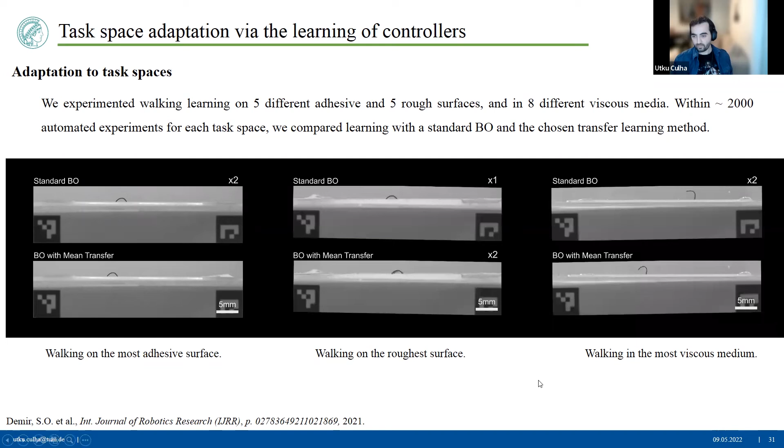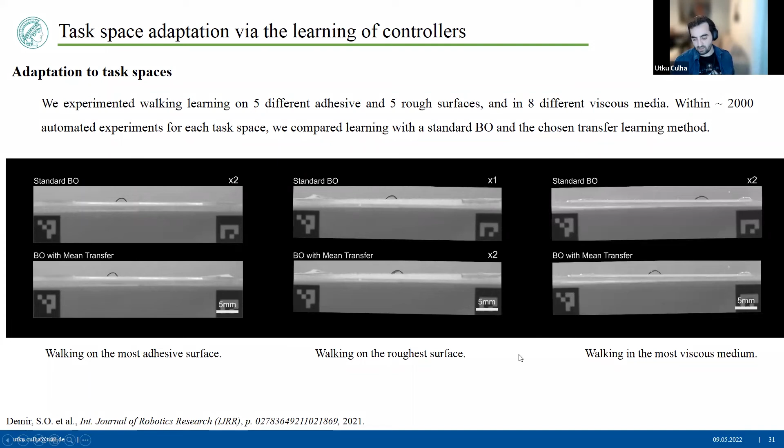So this was, in a way, again, introducing machine learning control and modeling to continuum robots with a lot of feedback. But this was kind of like cheating, because we were still using visual feedback for systems that were intended to be inside the human body, which is not really realistic, right? So that's why, as the next step, we investigated a different feedback system that is decoupled from the magnetic actuation.

One of the efforts is to really use the same actuation methods, such as MRI, to both actuate and do the imaging at the same time. But I believe that is generating more problems than solutions. So one of the most practical things, after speaking with the doctors and practitioners, the best way to do this in the real world was to decouple the actuation mechanism, which is the magnetic field, and the imaging method, which in this case was electrical impedance tomography.

It also has its own limits, because it has to be wrapped around, and it has to be inside a conductive fluid. But this was our intention, to really decouple and then go towards a full real-time feedback system. One can think of, for example, ultrasound as an alternative method for imaging. So this was our method of introducing feedback systems.

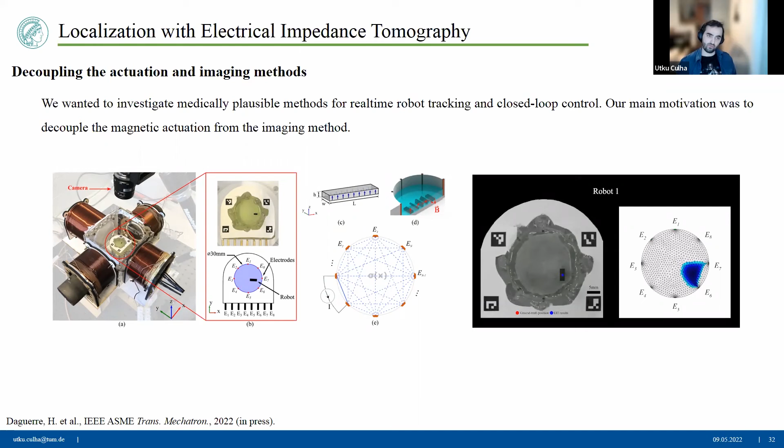This was one direction, and the last direction I'm going to talk about was applying Bayesian optimization to a completely different system. At that time, we were working with the Modern Magnetic Systems department at the Max Planck Institute. And they were producing thin films at the nanoscale, and they were applying them to the electronic sensors of Bosch. At that time, they were interested in covering the surface of these circuits with thin films.

But their problem was that if the thin film is not properly produced, it has gaps and it generates corrosion in the long term. So they didn't want that. And you can imagine this is a nanoscale fabrication method, with a huge parameter space. They wanted to see if we were able to apply the same Bayesian optimization, which is able to find the global optimum in a very limited number of steps.

We applied it, surprised the collaborators, and we were able to find the optimized fabrication methods, and the etched area, which is basically the error, the holes in the film, was reduced from almost half in less than 10 experimental steps. So this not only saves money, but also saves time, and at the same time gives you an idea about the optimal parameter set.

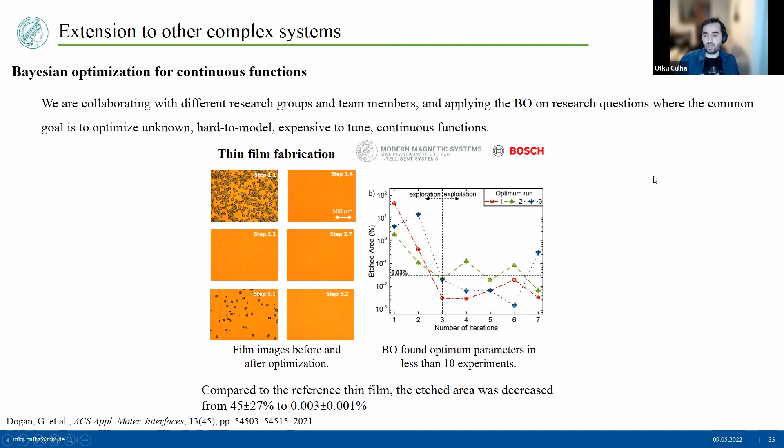So those were basically the last things that I have done. I think I have spoken so much. I'm sorry about that. Maybe I can talk about how I am now applying these things in the institute. I'm just going to give an overview, maybe just 5 more minutes, then I'll be done, I promise.

So basically, I am now bringing form, function, and learning into the systems here.

We are now working with robotic systems that are, again, more in the mesoscale in the applications. There's, again, work, health, environment, and mobility. But I am able to bring these expertise and application to the system as well, in terms of form: using rigid systems, using soft materials, how we can model and control them, self-assembling systems in terms of using maybe swarm and bringing an external control to swarm systems, or self-assembling systems maybe in the multiple robot configurations, and of course machine learning to extract the models of unknown systems, such as in soft continuum systems and statistical robotics.

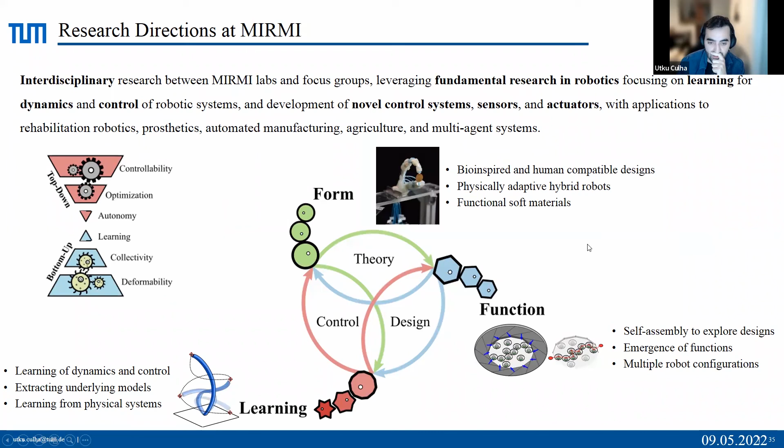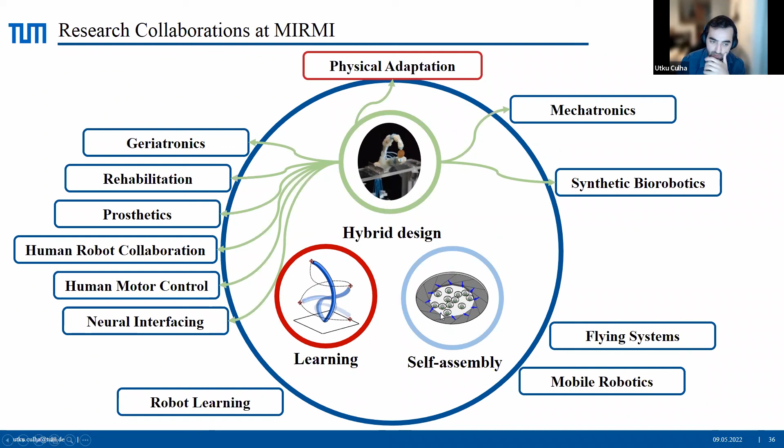So there are a lot of labs that I'm also leading here, not hands-on with each of them, but there are a lot of connection points between what I do and how my research is actually connected to them. You can see there are different fields here, and all of them have fundamental connections. Maybe one last thing I can say, those are the projects I'm currently involved in. I am a part of the research team. I have also written some of these proposals myself with the team. So these are all large-scale projects.

For example, KI-Fabrik is one of our lighthouse projects, which is aiming to build an automated robotic factory in central Munich, so that we generate knowledge for industry and we produce actual products. We now are working with BMW and Wittenstein, for example, to produce their own products. In the factory, that is actually also self-assembling. So we have mobile systems, mobile robots that can reassemble within, so that they can produce everything that is necessary.

So I'm a PI in this. I'm also one of the architects of the factory here. And we are building in the Deutsches Museum. I don't know if you know it, but it's one of the largest science museums in Europe. So the whole basement of the museum will be a factory now, and we are still building it.

Another one is the 6G Life project that we are collaborating on with University of Dresden and Technical University of Munich. It's quite a large one. The first one is, I think, about 20 million euros. The second one is something around 70 million. Germany realized that it's really slow in terms of communication technologies, and they really wanted to push, so that they are now the leads in 6G Life. I'm not a communication guy myself. I'm more interested in robotics.